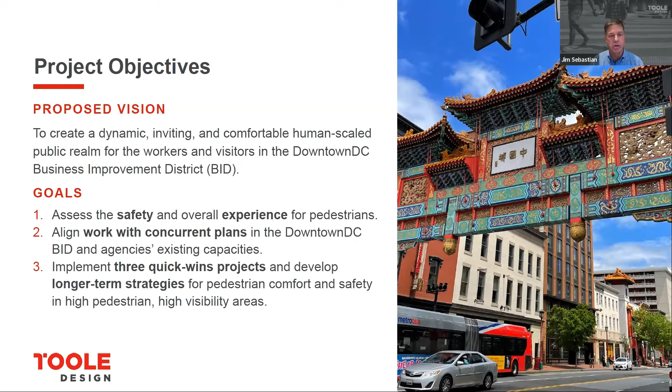Next slide. So the vision we have for this, we came up with this with the BID staff based on their request for proposals. We're trying to simultaneously improve the safety and experience for downtown pedestrians. We want to also work with existing plans that the BID has and DDOT has and other agencies. As part of this study, during the course of the study, we want to come up with 3 areas where we can do implementation of quick wins, like tactical urbanism type projects that will be done during the life of the study, and we can evaluate them. We also have room for evaluating some longer term projects and coming up with concepts for longer term solutions as well.

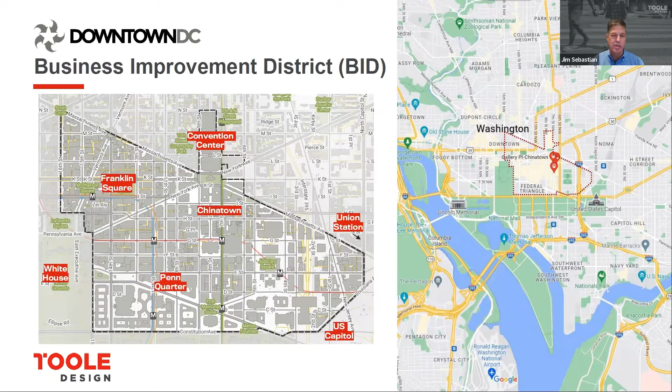Next slide. I think everybody knows where we are and where the BID is, but just in case, we've got Thomas Circle and the White House to the west, moving through Chinatown, Judiciary Square over to Union Station in the east. And you can see the borders of the BID there.

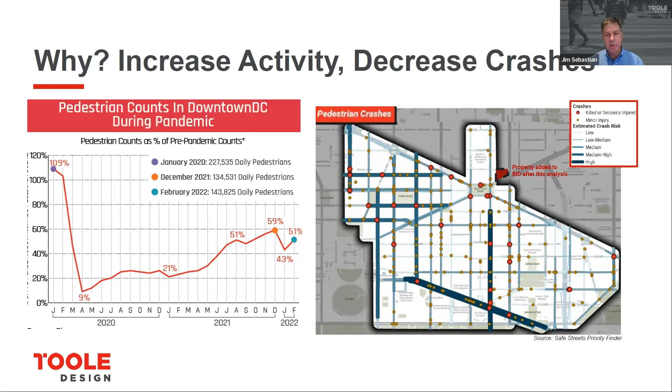So why are we here tonight? Why is this project happening? Why do we need your input? Well, as you all probably know, we've seen a pretty big drop in the number of pedestrians coming downtown since before the pandemic, somewhere in the order of 50% as of numbers from this past spring, 50% drop. And we still have persistent safety concerns. We have pedestrian crashes that we want to try to address. So it's this combination of trying to simultaneously bring more people downtown while decreasing the number of crashes and injuries and even fatalities that are happening on the downtown streets.

Next. So here's where we'd like to get just a little bit of information from you all to kick things off and keep it interesting.

And Brittany's going to pull up something called a Mentimeter poll. There's a couple ways you can access this. You can either hold your phone up to the QR code, and that will bring you to the website menti.com, or you can just go to menti.com, and either way you put in that number there, 1196727. We'll give everyone a few seconds to try that and get the poll up, and then once you're there you can start entering in questions. We only have about 4 questions at this point, and then we're going to do about 5 more.

Oh, looks like people have figured it out. So this just gives us an idea of who's here tonight, how you utilize the downtown area, why you come down here. Looks like a lot of people work downtown. We have a few residents.

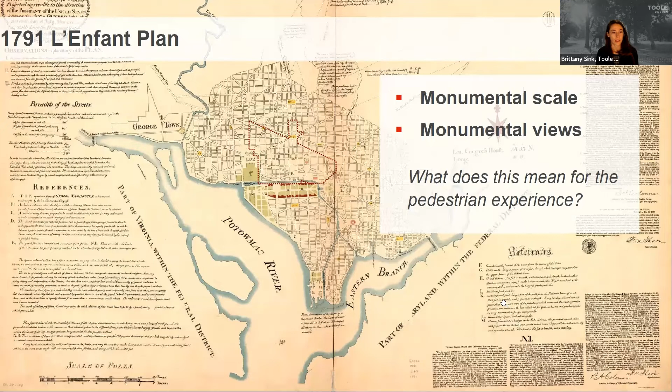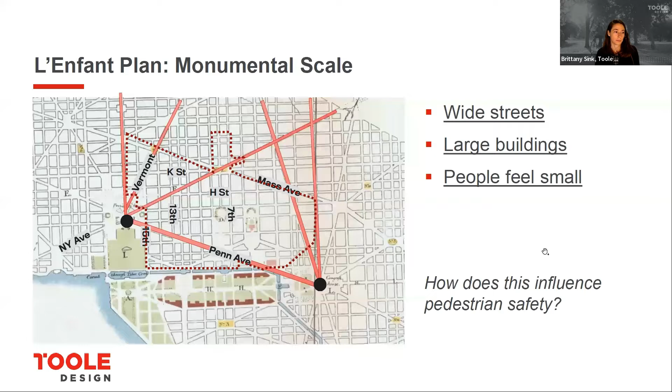And then we asked the question, what does this mean for the pedestrian experience and level of safety? So this is our district, and from a pedestrian safety perspective, there's a lot of wide streets, large buildings, and you can get lost in the landscape because of that. The intent was for people to feel small.

We're going to need to consistently come back to how people are using them, and how the mode is distributed across—like, are there enough cars that we should be widening, how many lanes, are there sidewalks and do they need to be wider because of the amount of people? We just have to constantly stay in that balance, evaluating the use versus the need.

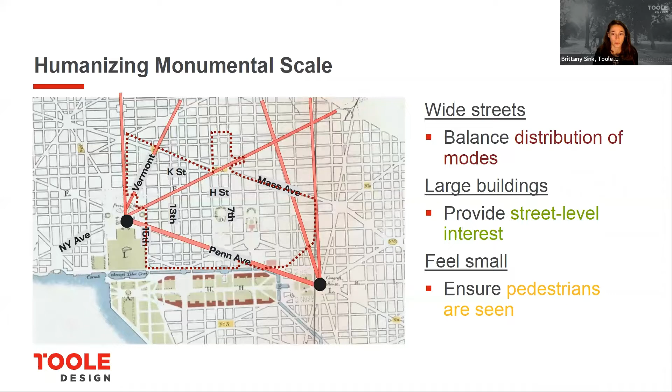And so then it also comes down to, with those large buildings, if you're a pedestrian, you need it to be interesting on the ground level. So that's something that we can add, and just make sure there are things that are human scale. And lastly, for a safety perspective, we want people to be seen when they're at an intersection or crossing the street.

As far as the monumental views, it's very orienting. You have monuments to look at. It provides a sense of grandeur. And so you know where you are based on these landmarks—it's harder to get disoriented when you can see those.

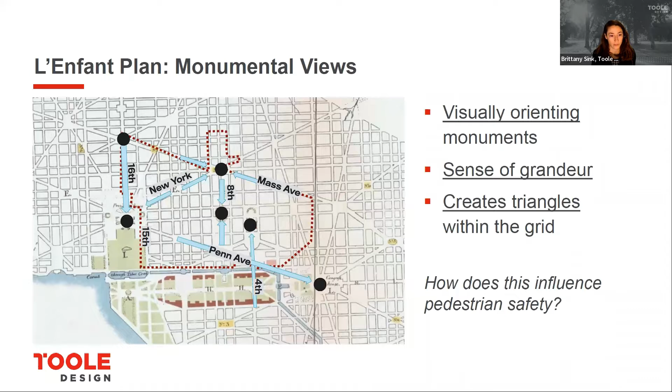But the other thing that it adds is, because there are these views, there's triangles. And triangles introduce irregular intersections, which can be unsafe if people don't understand how to move or where to look or how to cross. So that's our goal for this, is to maintain those views, but also create a sense of prospect and refuge where people can come off of those very grand boulevards and have a place to congregate.

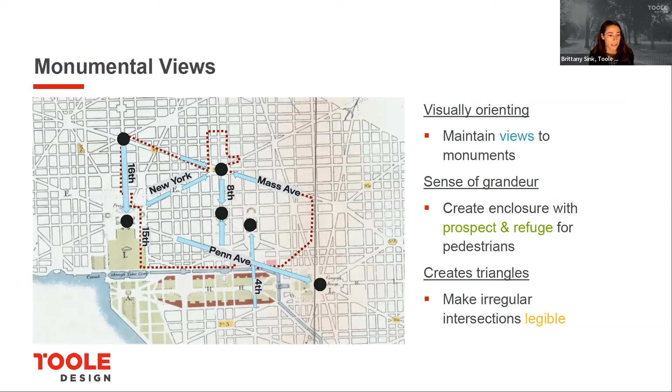There's a big need and desire for public use and public space in this downtown, I think, as we've experienced from other studies that are taking place. And lastly, what can we do to make those intersections more legible so that people know what to expect when they're coming to them?

These are some of the intersections that we're making sure we're watching, because based on an analysis that we ran, these are where our high risk areas are.

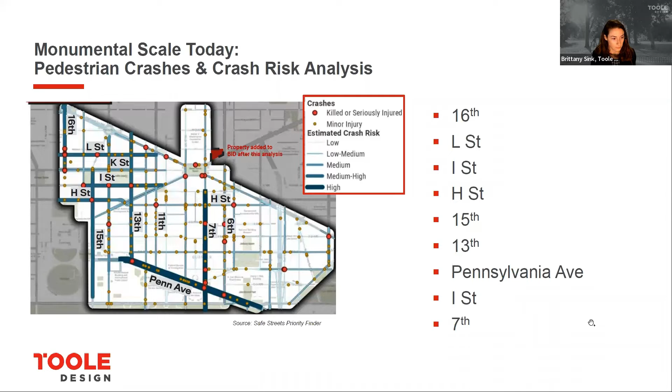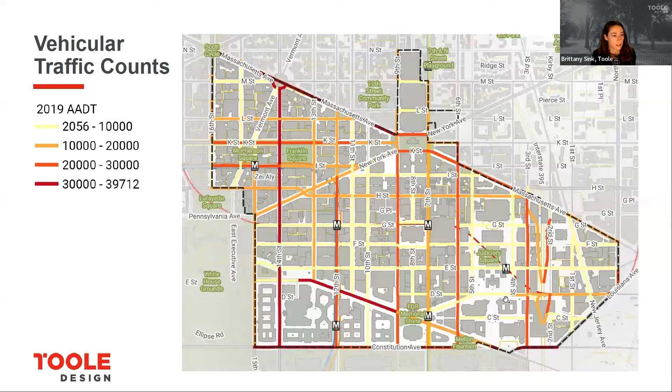We also took a look at volumes, and it may not be any surprise to anyone what we're seeing, but there's a significant emphasis on cars and driving in this area. So we need to take that into consideration as well.

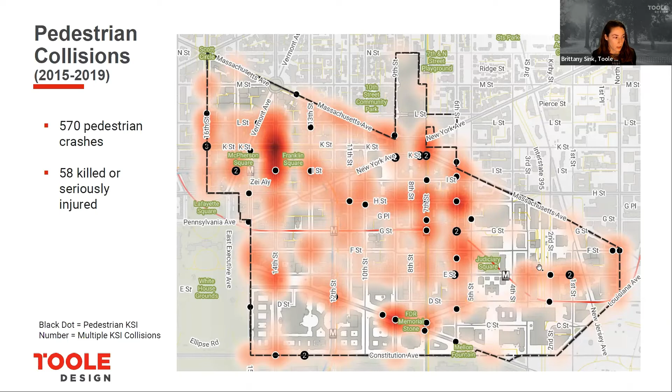So also part of our analysis, and just putting as many things to paper as possible, we got together as a group and shared how we know the BID as a group. When we're intimately walking on those spaces, what do we feel? What do we need to know? And what are we taking into account?

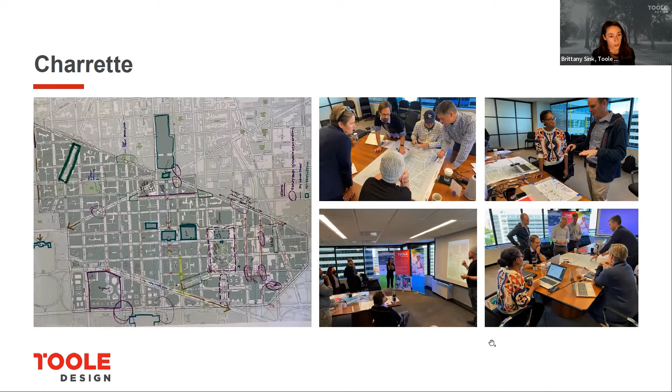And some of the conclusions we came to when we asked, where are the people and why are they there? There's an area that people are more active, and there's an area that people are less active.

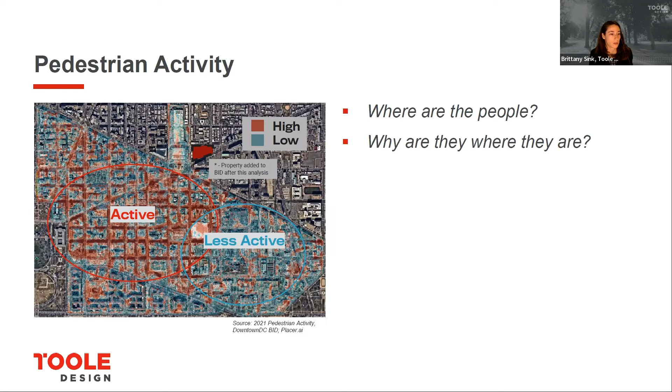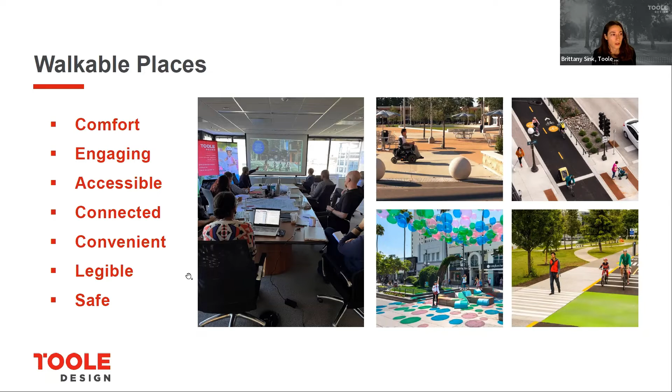That was in line with some of the presentations that we looked at, which is based on principles of spaces needing to be comfortable, engaging. People need to be able to move and go through them as they need to.

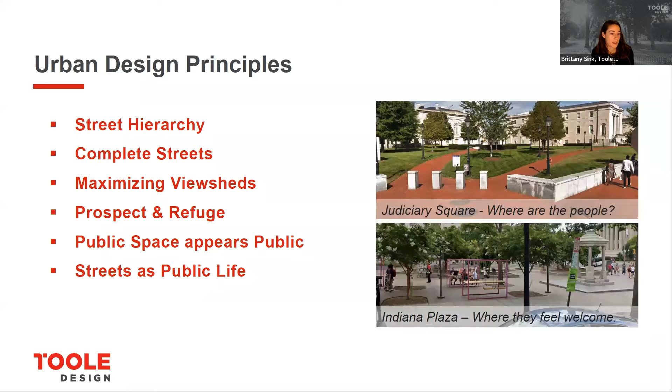And then they should also be well connected, legible, convenient. These are all principles of spaces that we enjoy to be in as people. And then lastly, the urban design principles kind of told us, where are the people and where are they not? It's where they feel most welcome.

So some observations as far as that pedestrian experience. In the active area, we have buildings that are not as large, and they have more uses, smaller blocks, and lots of attractions such as Chinatown, Convention Center, places that people want to get out and walk, as well as they're well serviced by the metro. On the other side, there's many highway ramps, institutional buildings with a little less attraction and drive to get there.

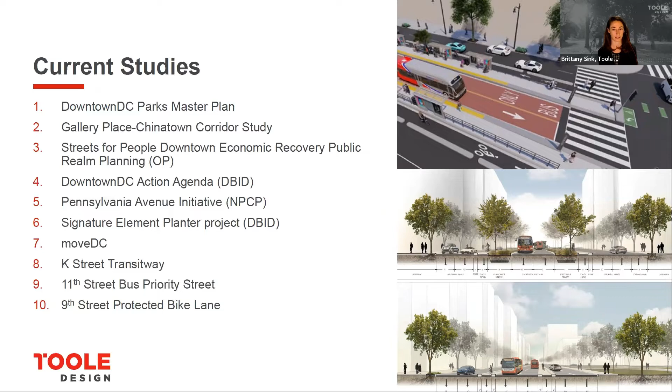These are the studies that we reviewed. Some are currently underway, other ones are approved. If you have anything that you would add to this list, you can throw it in the chat.

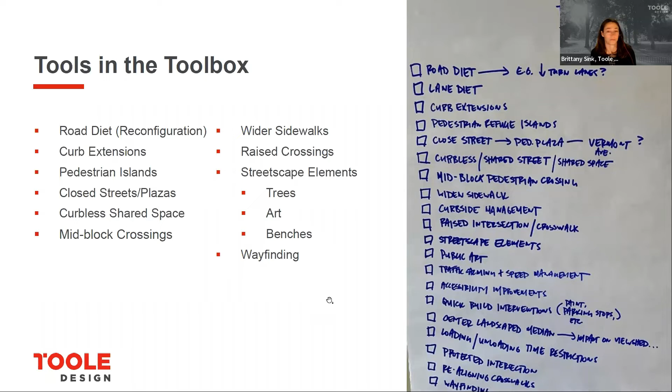And we compiled a long list of what you can do to bring solutions to some of these problems that you guys have raised. We're going to keep drawing up more, but this is what we got for now. And so here's a description of what some of them are.

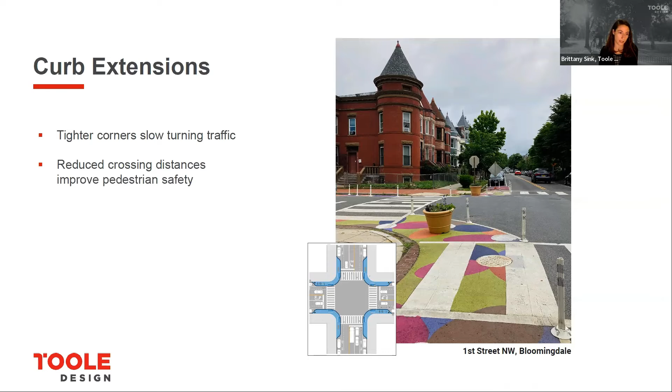Anyone who's not familiar, a curb extension is when you extend where the curb is. That can either be with paint or with an actual curb, and it helps people take their turns a little bit slower, see where a pedestrian is before they make a decision to yield or keep going.

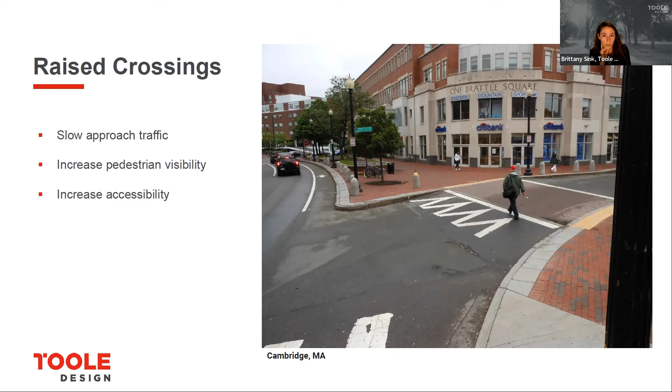We've also got raised crosswalks, which allows the pedestrian to be more visible, and also helps people pause and modify their speed when they're coming up to a crosswalk, draws more attention to it.

Then there's also mid-block crossings where you can extend out into the roadway where people are already maybe jaywalking, or there's just a desire line there, and there's a need to get across. So sometimes you have to make accommodations like that.

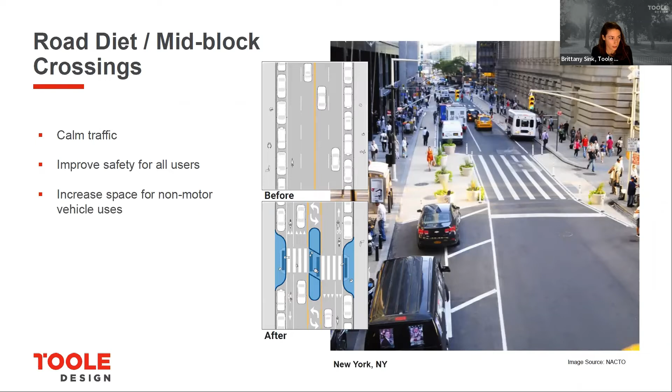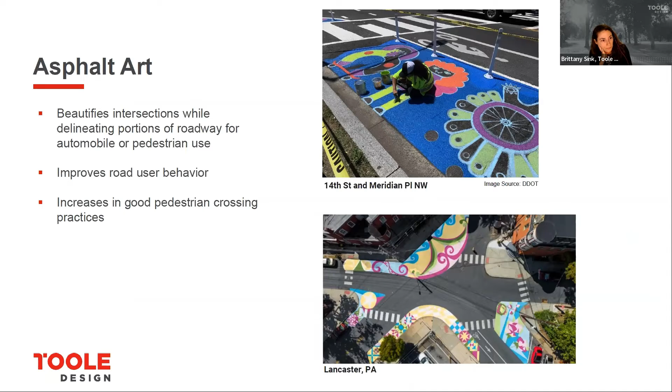There's some other solutions for something like a curb extension or a road closure. You can do asphalt art. There's a program in DC that's currently underway. People may be familiar with that.

You can also close streets or create plazas, improve open space. It gives you lots of texture and helps people slow down and just understand this is a public place, and so they need to look for people. This can be done with either a level street where there's no curbs, or just a road closure, improving parks, that sort of thing.

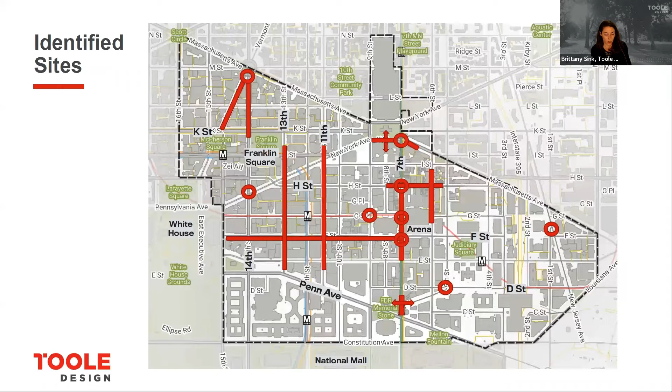So here are some sites that have come across our table that we think are problem areas, or we've been given different insights. I'll come back to that map, but here's a list of the sources that they've come from and their location.

I think, Jim, would you like to take it from here? Sure, yeah.

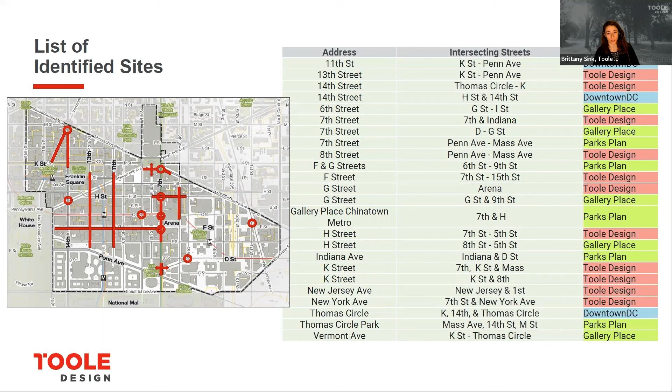I'll stay here all night, but I'm guessing some of my colleagues would like to eat dinner, go to bed, and maybe some of the residents would also. Anybody else? Jim will put his cell phone number in the chat, and you guys know where to find me, I'm sure.

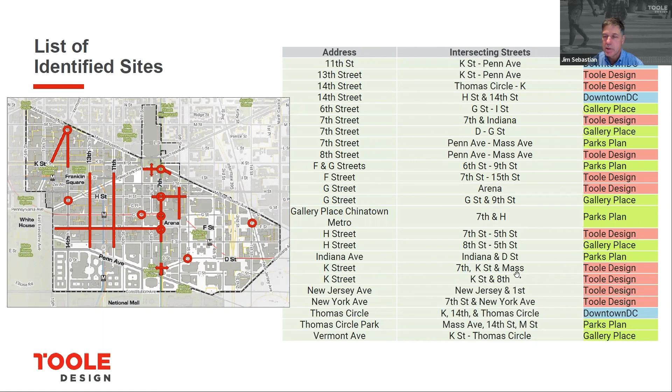But yeah, I think we talked about next steps earlier. If anybody has any comments, what should we do, Maria? Should we have them comment from the website or the microsite, or should we have them contact you directly?